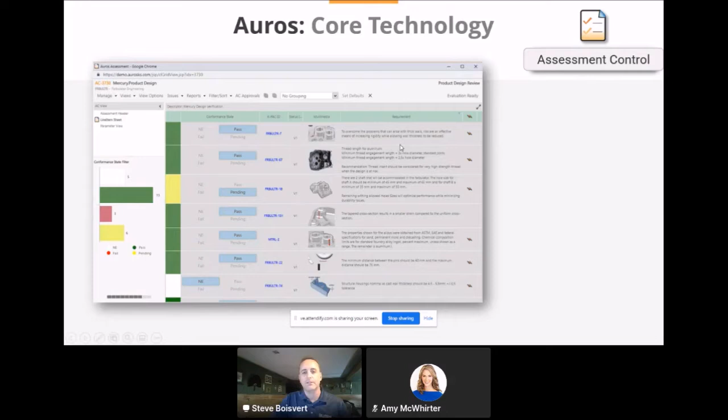So this is one of the views we have for an assessment control. Every line here is a knowledge packet, and we can provision that into the flow of work. He also mentioned there's another view that's really important to us, being that the demonstration I'm going to perform is connecting this knowledge to CAD, so extracting all that textual information out of a knowledge pack and boiling it down to just those value tables.

And we start looking at those parameters. We can view the parameter view of a set of knowledge packets within an assessment control and see how they're performing. We can get right down to that parameter, see its value, see if it's performing correctly or as anticipated, and we can see that with the colors here. I'm going to show how this all happens within a CAD application.

And then lastly, to make this all work, we need a rule processing engine. We need that set of services that understands these parameters and understands the rule, the context of the rule, and then given the inputs can process that knowledge and deliver back a quantitative state, whether things are good or bad or as anticipated or not.

And to show how this works, how all of these things work with an external application, whether it be a CAD application or a simulation tool set, or even just a PLM system, there's a particular way information is transferred between the primary application where individuals do their daily work and the knowledge repository. So to illustrate that, we have our external applications on the left.

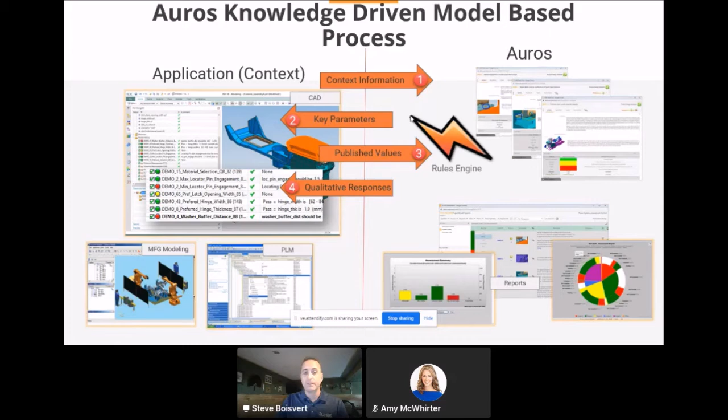One of the things I want to show real quick is a connector, because we get asked all the time: do you have a connector to this CAD application or that one, or you're showing me this demonstration inside of NX, but can you show me it inside of Creo or CATIA or SolidWorks, and how does it change? Well, one thing I want to mention is the connector for our CAD applications is the same no matter which CAD system you have, whether you're in NX, CATIA, SolidWorks, AutoCAD, Ship Constructor, or Creo, the view is going to be the exact same. The experience within the tool set is different because they're inherently different.

The parameters inside of NX are called expressions, and they have a particular process you have to follow. Inside of CATIA, they're relations and parameters. And inside of SolidWorks, I think it's a global variable and part property. So there's differences inside the tool set for sure, but the connection to the application is going to be the exact same.

So I want to go through this because it's something that developed within the last year or so, and I want to make you aware of how this works.

It has 3 panels. We have a settings panel first, which shows what model we're connected to, what Auros instance we're connected to, where we're getting the knowledge, and where that knowledge source is coming from - is it from a knowledge packet set or from an assessment control. There are others besides that, but for today's demonstration, these are the two primary ones we're going to use.

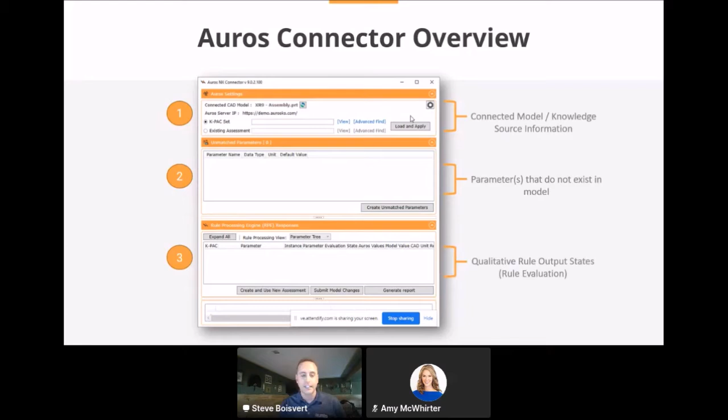And then lastly, we have the third section, which is the rule processing engine, or the responses, where we're going to see our qualitative rule output states, where rules are going to be evaluated.

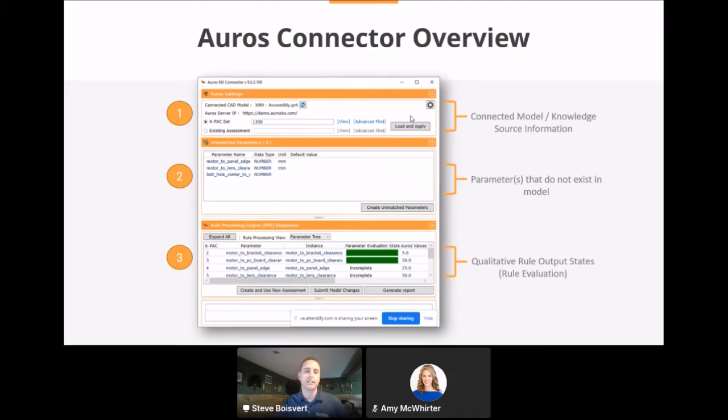Once it's connected and working, you're going to see something similar to this. We see the parameters that are not connected in the middle, we see the reds, yellows, and greens at the bottom, and that's going to show in the model. It's also going to be stored inside of the knowledge repository.

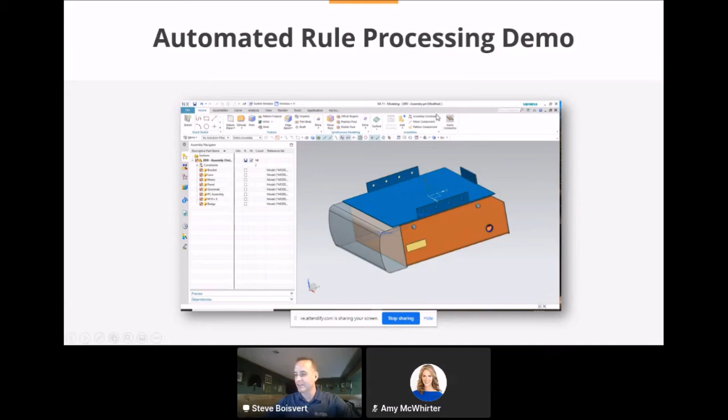So with that little overview, let's dive into the application. We're going to use NX - I always use NX for this demo, and the reason is that's what I have on this laptop. Live demos, as Jeff mentioned, are riddled with all kinds of pitfalls, and I'm trying to avoid that by making sure I have the ability to connect and modify as needed with what I have on this machine.

So let's get out of here, and we're going to open up our model. You can see I have my little garage door opener model here - quite the assembly. What I want to do today is go through a basic example, and it's actually a real life example, one that many of our customers perform on a daily basis: a part-to-part assembly verification, and maybe even part to tool verification.

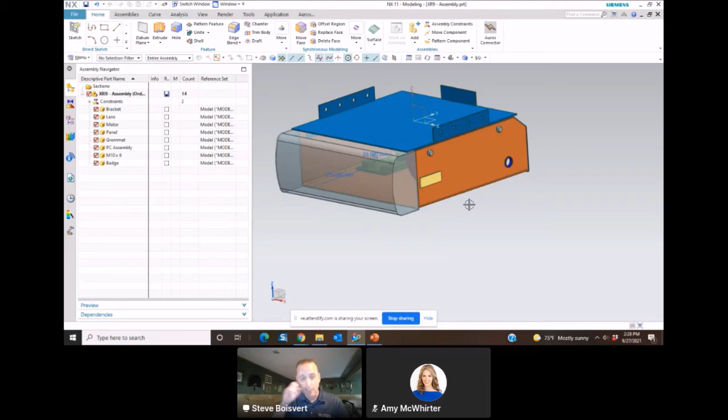So here's our model. We have a few parts, right? We have some different components - we can see a bracket, lens, motor, panel - a real basic model with some fasteners and such.

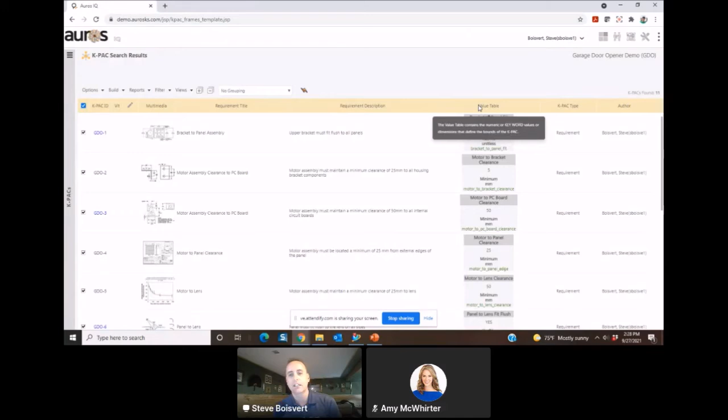And I want to show you the knowledge that we're going to connect to. So let's go into Auros IQ, and we're going to look at my garage door opener community that houses all of the information we're going to use. Inside here, I have a set of knowledge packets that have been built that just look at part-to-part clearances.

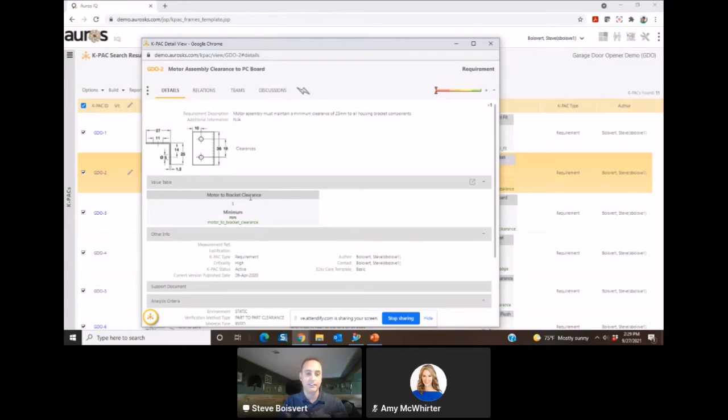This one is a motor assembly clearance to the PC board, and you can see here there's a value table - 5 millimeters is the minimum. To see how that works, once I connect this into the CAD system, if that value is less than 5, I'm going to get a response that this failed that rule, and I'll get this end user message that says you should be at least 5 millimeters, but you're currently 4, so you're failing this requirement. If I connect this into the CAD application and I get anything 5 or greater, then I'm going to get this green condition. So that's how the rule processing engine is going to receive values, process the values, and display those values back - not necessarily within Auros, but within the CAD application.

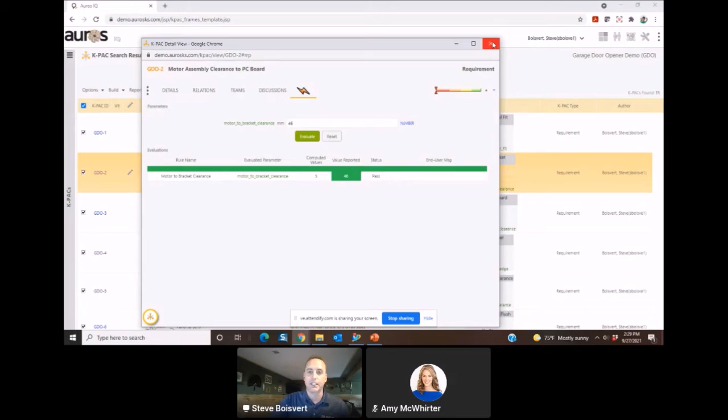So let's dive into there. We have a few rules here. I have one tooling rule that I'm going to do - even though it's part clearance, we're going to do a tooling one. This shows a little bit of complexity, and we're going to make this all happen from the Auros connector. Regardless of which CAD application we're going to look at, it's going to be the same exact thing.

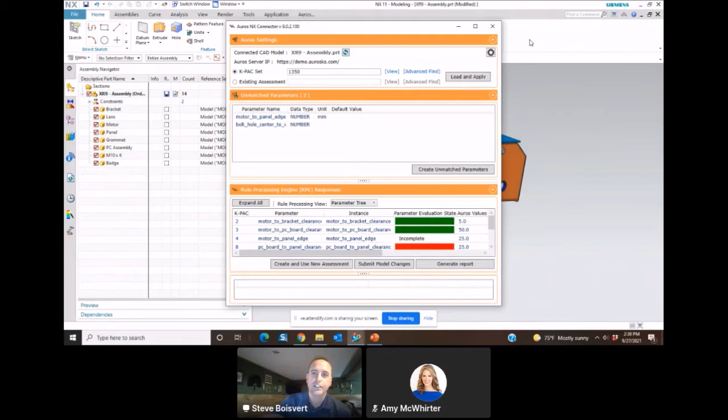So I just opened my connector, and we took a look at how this functions. We have 3 panels here. The first one's telling me I'm connected to a set, so this model knew there's a set of knowledge packets it was connected to. Once I made that connection, it shows me there are 2 parameters that exist in that set of knowledge that don't exist in the model. So my very first thing before I do anything else is add these into the model.

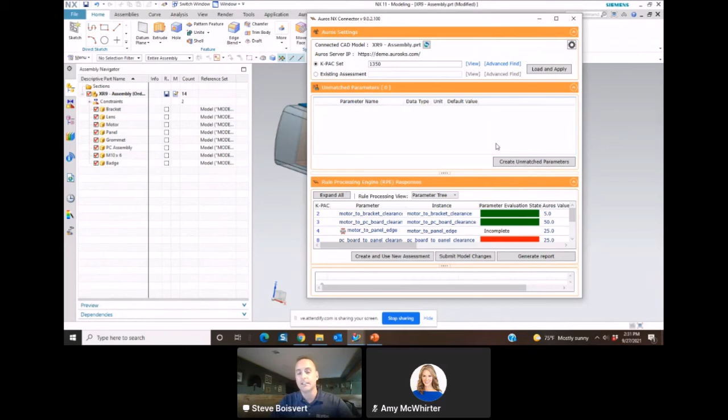So I'm going to create these unmatched parameters. Now at this step, maybe I need more than one. I could create as many instances of these as I need, maybe 5 measurements of the motor, or maybe there's 4 holes, whatever it might be. I can create several instances of these parameters and then run rule processing against each instance. For this demonstration, we're going to use one. We're going to keep it simple and try to end on time.

So at this point, I have my parameters in my model. You can see my parameters here inside of the Auros NX connector. And if we look inside of NX, you can see those same parameters and their rule processing states inside of the part navigator. So we have data being synchronized across these two applications, same exact thing.

But I also want you to notice we have these little icons here. What that's telling me is I have parameters that exist in the model that aren't connected to some sort of feature, whether it be a measurement, a dimension, a design feature like an extrude length, a part property, something such as that. My parameter isn't connected to anything, so I have a broken link. You can see I have an incomplete status, meaning the parameter's in there, but it's not doing any work. So we're going to address all these things.

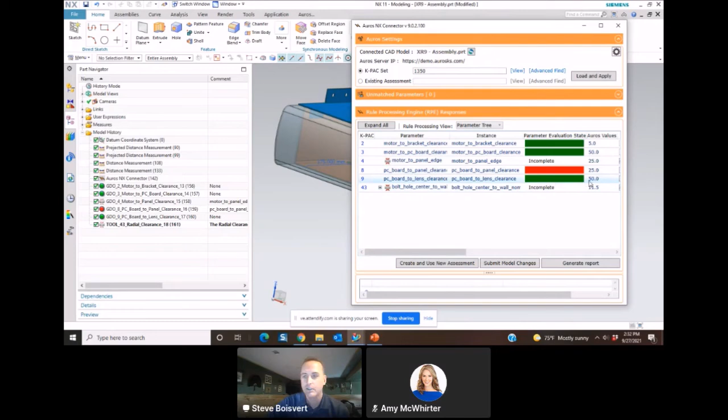First thing we're going to do is we have a red condition sitting right there, so I want to show you how we can handle or modify this. If we take a look, whether inside the Auros connector or inside of NX, I can see the end user message telling me, hey, this PC board panel clearance should be 25 millimeters, but it's currently 20 millimeters. So I'm failing this particular rule.

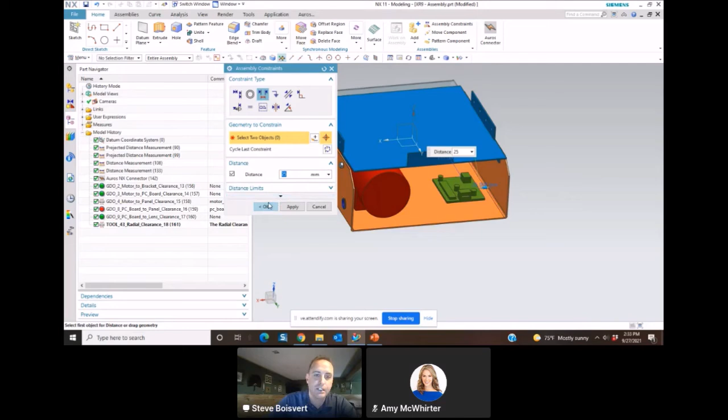This one happens to be connected to an assembly constraint. So if I click on that assembly constraint and go into edit, I know the rule is 25 — maybe I didn't know that was the case when I developed my model. I update that to 25, and now that new value goes off, gets processed, and I can see I have a green condition. So I satisfied that rule.

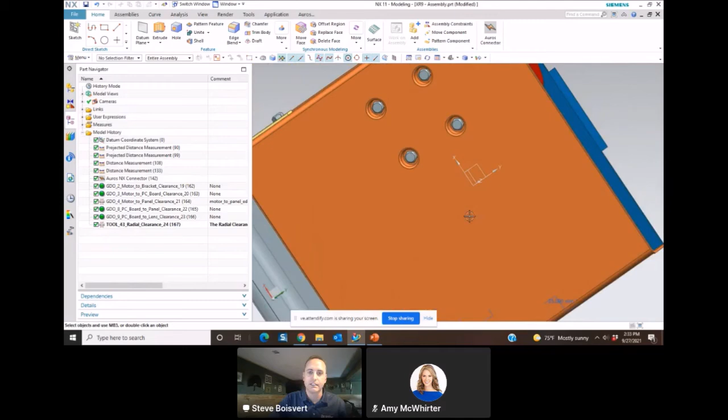But I have 2 other rules here that aren't satisfied, right? I'm still unlinked. So if we look around, I have some fasteners on this particular assembly, and one of my rules has to do with tooling clearance. So let's open up that connector again and take a look at this bolt hole center-to-wall nominal evaluation. Maybe I don't know what this is.

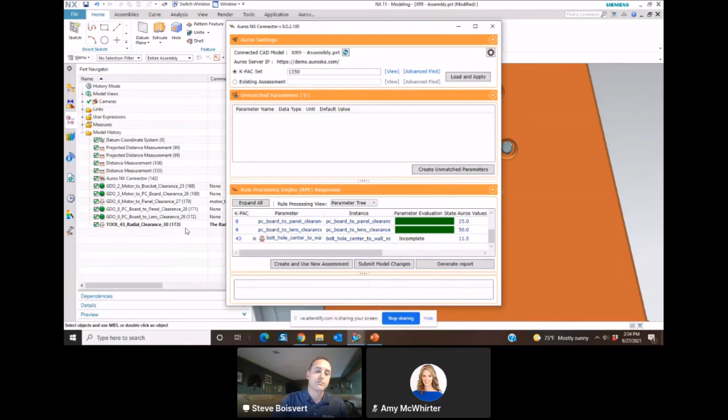I have knowledge being provisioned to me inside this application. As a CAD designer, I may not know the details about this, but within the application I can click that knowledge packet and go right to the details. I can see this has to do with the minimum clearance for tooling, to make sure that socket can fit within that space provided to make a good connection onto the fastener. It has something to do with the type of fastener we're using and the size of fastener, and based on that there's a certain clearance I have to maintain in order to make these sockets work. So now I kind of understand what this rule is. Let's just close that for now.

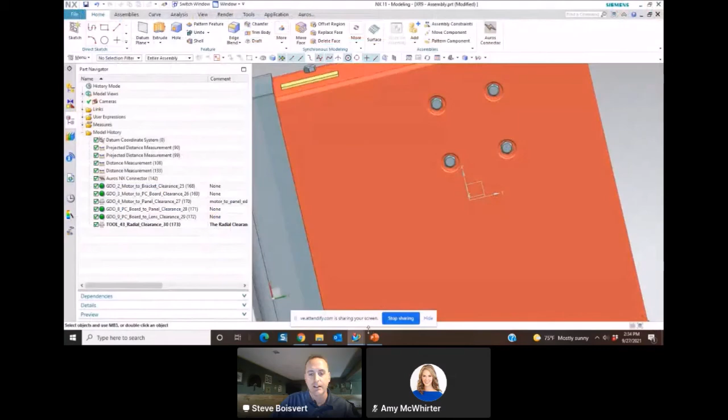We're going to go back into our model. Let me get this out of the way so we don't have to see that. We're going to go in here and turn off our fasteners, because what I want to measure is this clearance from the center of that hole to the wall. I have my parameter here, and it's not connected — there's no value. So a very simple way to make a connection is to just use a simple measure. Is this the only way to do it?

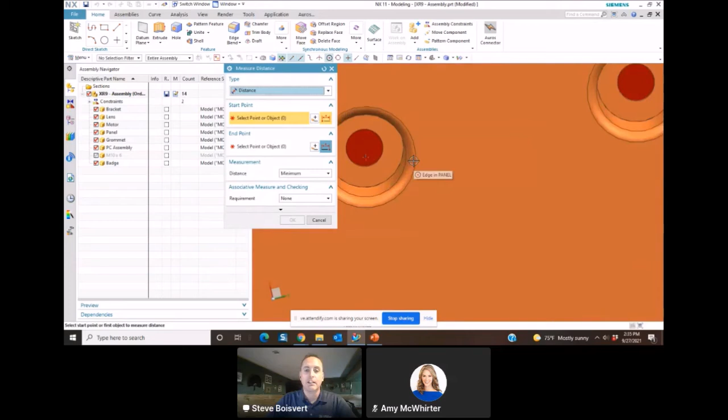Absolutely not — there are many different ways to make a connection to these parameters. For the sake of this demonstration, this is just one way. We're going to edit this parameter and link it to a measure. We're going to come into our part, look in here, go to the center of this hole. There, I find my hole here. We're going to go to the center line and measure to the wall.

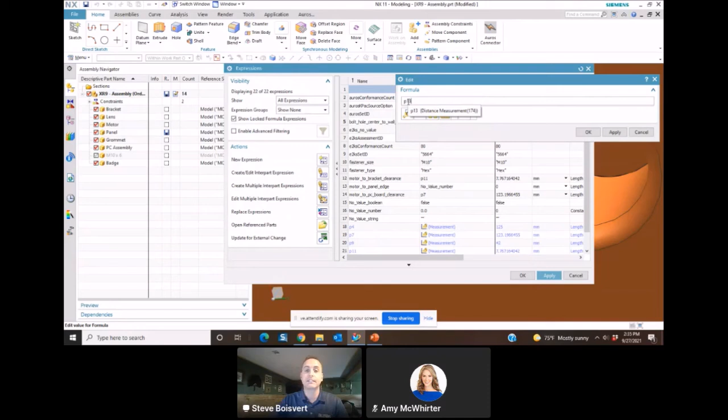So it comes out with 10.5277 millimeters. I hit OK, and now that parameter, this bolt hole center to wall nominal, is going to be attached to the NX parameter P13, which is a distance measurement.

And it's a persistent measurement that's going to stay in the application. So once I made that connection, that value is processed by the rule processing engine. The rule processing engine comes back and says, hey, it's too small.

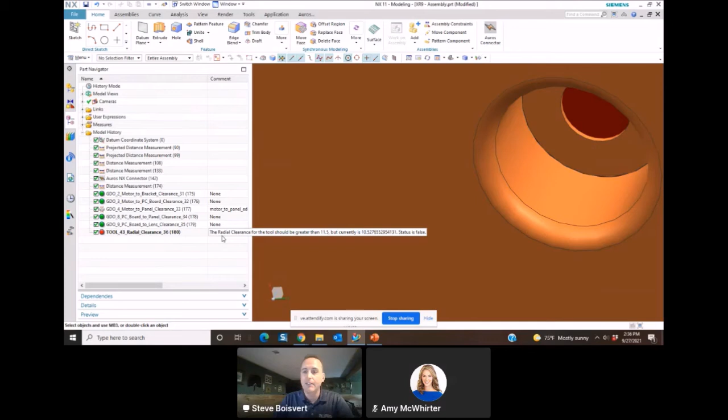You need to increase the size of that pocket to let that socket fit in there. So depending on what design phase I'm in, I may have the ability to just change this. I can go into the assembly. I'm going to make the panel my work part. I'm going to come to my history. We're going to modify the sketch. I'm going to go to my pocket size, and we're going to increase this. Let's say 28 millimeters now is going to be my pocket.

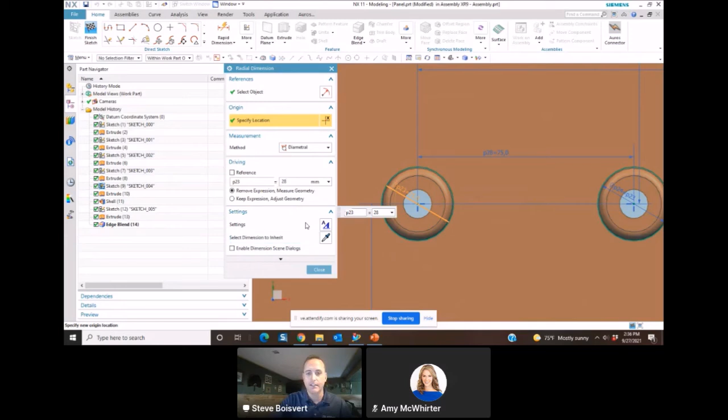So my pocket updates. I finished my sketch. Everything's modified. Let's go back to our assembly. We'll make that our work part. We zoom out, look around. Our holes are still there. And if we look at the part navigator, now our tooling requirement is now satisfied. So it's where it should be.

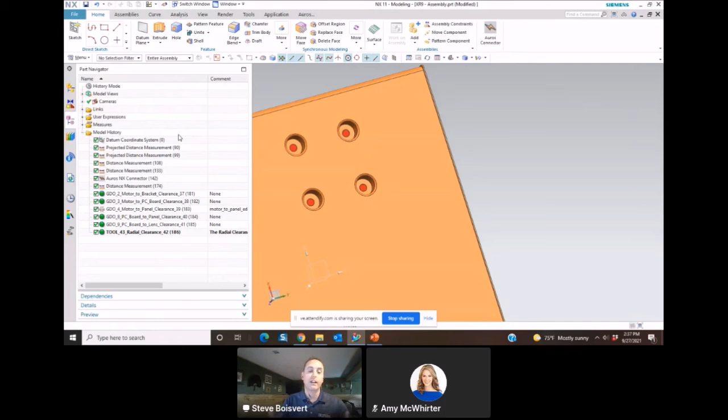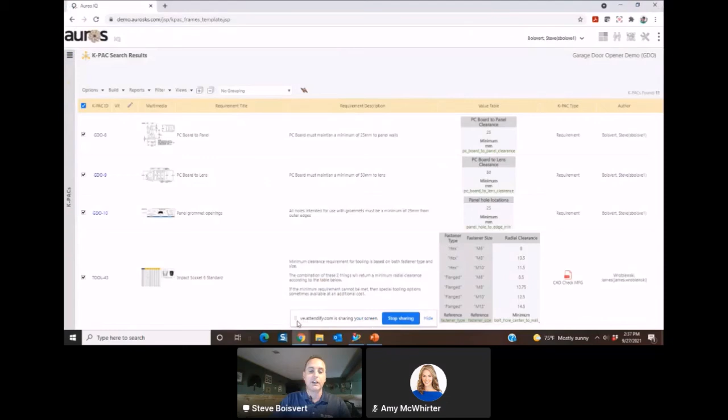So at this point, we have almost all of our parameters hooked up. But I kind of want to change course a little bit. We're not going to do the last one. With the time we have left, I want to show you what it means if new knowledge is introduced. So let's go back into our community and let's create a new knowledge packet really quickly.

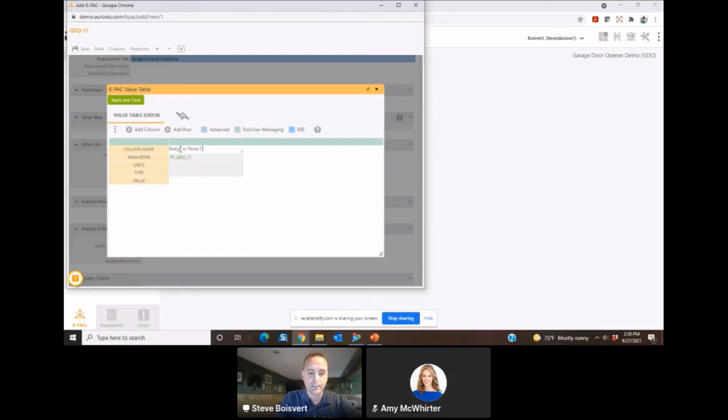So we're going to create a new knowledge packet, and this is going to be for badge to panel clearance. And we're going to give it a quick value table. We're going to go to our value table editor. And again, we're going to tell it this is the badge to panel clearance. And give it a parameter name, badge to panel. And we're going to give it some units. Let's say this is in millimeters of length.

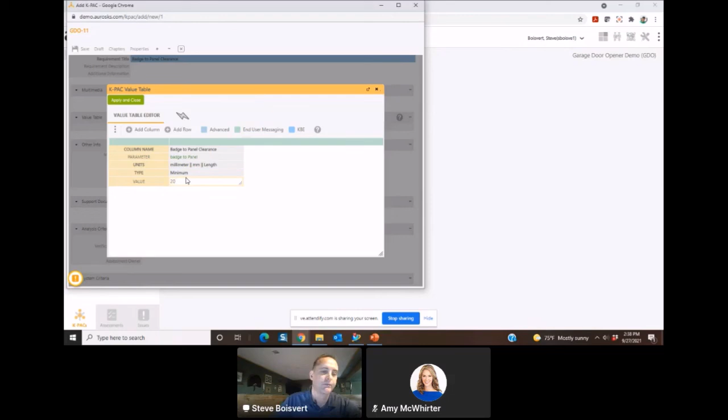The type is going to be a minimum, and our minimum value is going to be 20. So minimum value for the badge to the panel, 20 millimeters. We're going to set some criteria. What's the verification type? It's part-to-part clearance. What's the verification level? This is an assembly. And we're going to hit save. We're going to make this active because we can. It's a demo. And now we have our new knowledge created.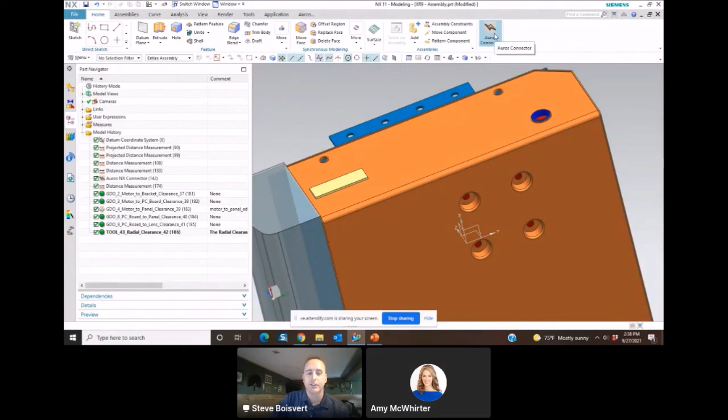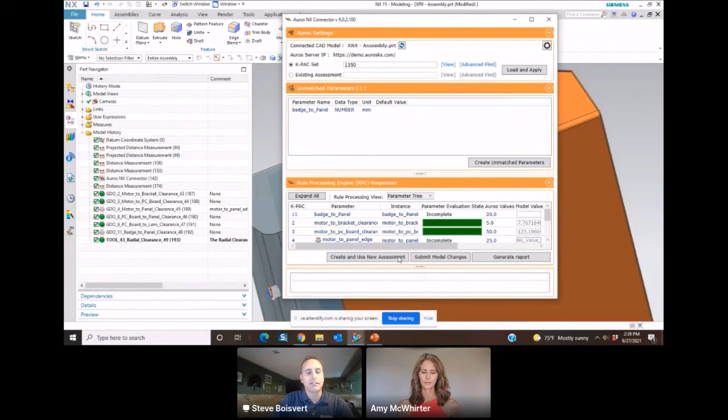Come back to our connector. And here you can see that knowledge packet I just created with that badge to panel parameter is now showing up and is telling me, not only in the panel, but in my model, hey, there's new knowledge I need to consume. At this point, I can create that particular parameter, and then I have all of the information inside of my model.

And Steve, we have one question. Nicole is asking, can you set a parameter to be surface to surface, or do you need a line point feature? So I think in the assembly constraints, if it is a surface to surface assembly constraint, I'm not sure how we would do that actually. I'd have to think about that one, Nicole. I'm not exactly sure. I've never tried it.

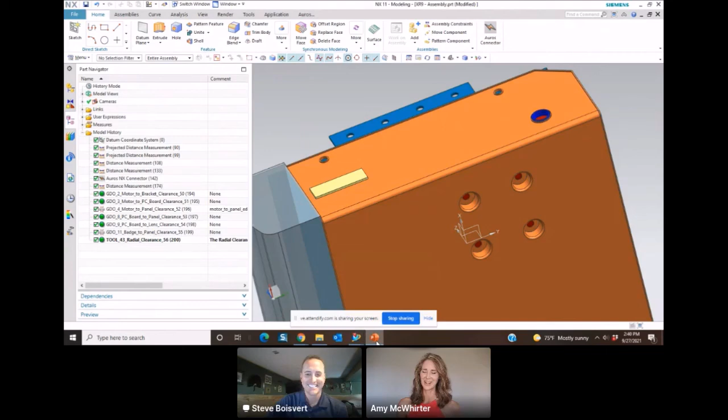Well, good. So I guess you guys could connect separately on that. So that was a good question. Thank you. And Nicole also loves your trophy room. At least that's what it looks like. Yeah. Is it? Well, it's just the basement area. Yeah, it's my man cave.